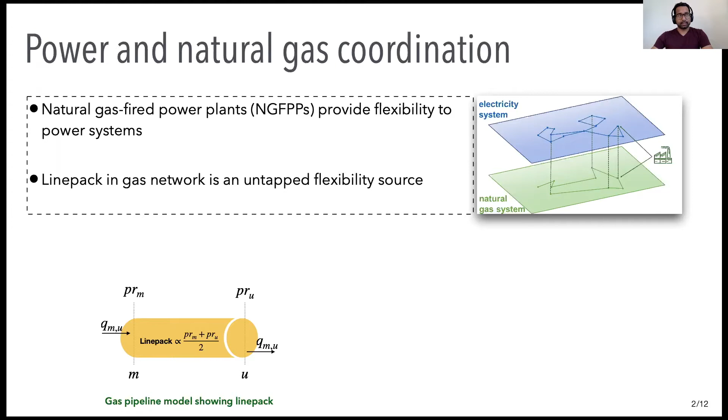Let's look at this model of a gas pipeline between nodes M and U. QMU denotes the flow of gas across the pipeline. Pressure M and pressure U indicate the nodal pressures that are usually bounded by physical limits.

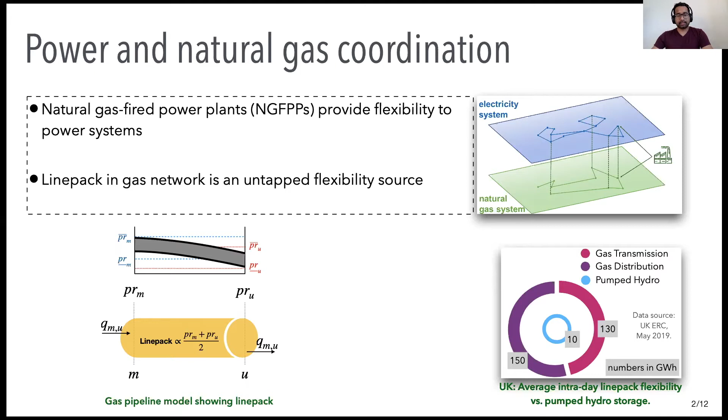Power systems across the world are evolving such that renewables supported by flexible generators such as gas-fired power plants are replacing coal. This interdependence between the gas and power sectors means that gas operational constraints are becoming more and more relevant in the day-ahead power dispatch problem.

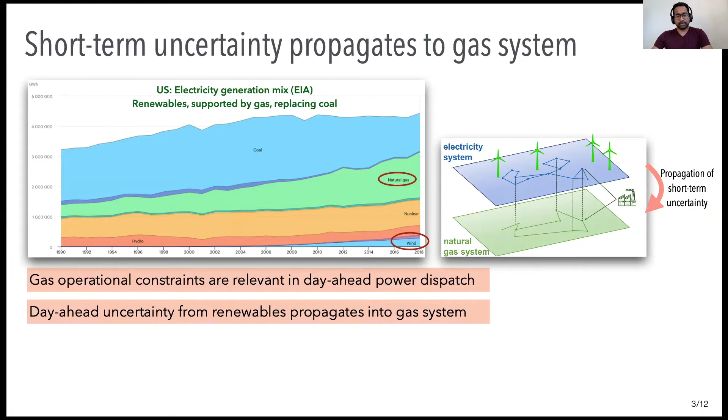Moreover, short-term uncertainty propagates from the power systems to the gas side, which causes congestions in the gas network, as well as results in unavailability of fuel for the gas-fired power plants. This, in addition to endangering the reliability of the gas supply system, also hampers the amount of flexibility that it can provide to power systems. That brings us to our research question.

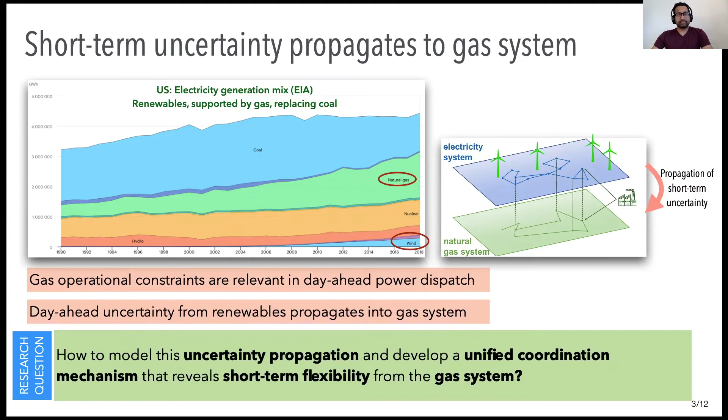How do we model this uncertainty propagation and develop a unified coordination mechanism that reveals short-term flexibility from the gas system? The answer lies in stochastic power and gas dispatch.

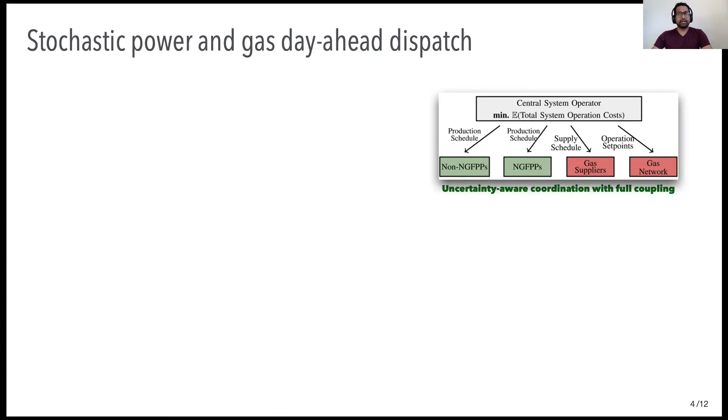We consider a fully coupled power and gas system such that a central system operator dispatches both the power and the gas systems. In a generic form, we can write the joint optimal dispatch problem like this.

The objective function here minimizes the expected cost of operation for the power production and gas supply. The decision variable x tilde contains the decisions such as production from various generators, nodal power injections in the electricity grid, gas suppliers' injections, as well as the gas network variables such as nodal pressures and flows, which are needed to operate the line pack.

We write the inequality constraints G of I as distributionally robust chance constraints defined over an ambiguity set pi. We assume that the true probability distribution of uncertainty faced by our problem comes from within this ambiguity set. The parameters epsilon denote the violation probability for each constraint. These inequalities involve generator production limits, gas supply limits, power flow limits in the lines, and similar engineering constraints.

The functions h of j are linear in x and ensure the balance of gas and power in the system, and they capture the intertemporal dynamics of operating the line pack.

Lastly, the functions wk are non-convex quadratic equality constraints, also known as Weymouth equations. These equations govern the physics of steady state flow of gas in a pipeline as a function of the difference in squares of pressures at the terminal nodes.

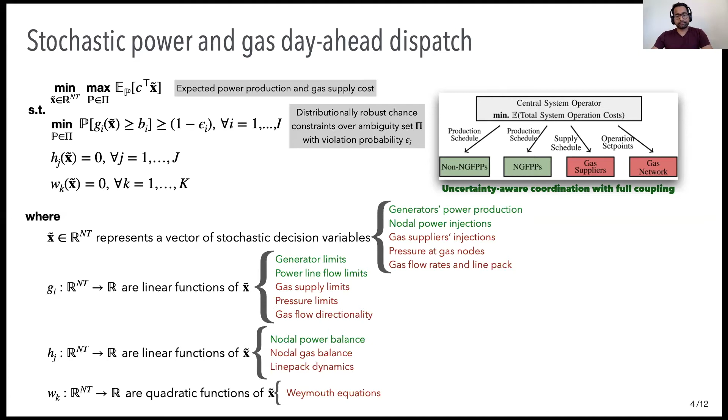There are two issues with this problem in its current form. First, the variables are stochastic, which makes these constraints infinite dimensional and the problem becomes unsolvable. Second, the non-convex Weymouth equations need to be convexified in order to ensure global optimality is reached. I will now discuss how we tackle each of these challenges.

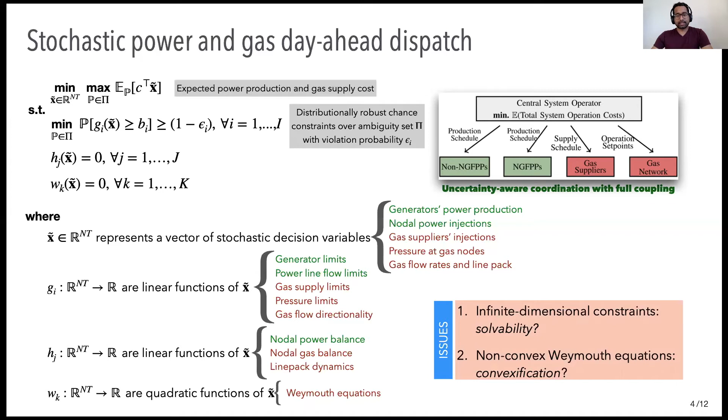First, to ensure solvability, we adopt moment-based ambiguity sets for our uncertainty. Assuming that wind forecast errors are the only source of uncertainty, we define ambiguity set pi that contains all probability distributions which have a given mean and covariance. We assume that the mean and covariance are available through analysis of historical forecast errors.

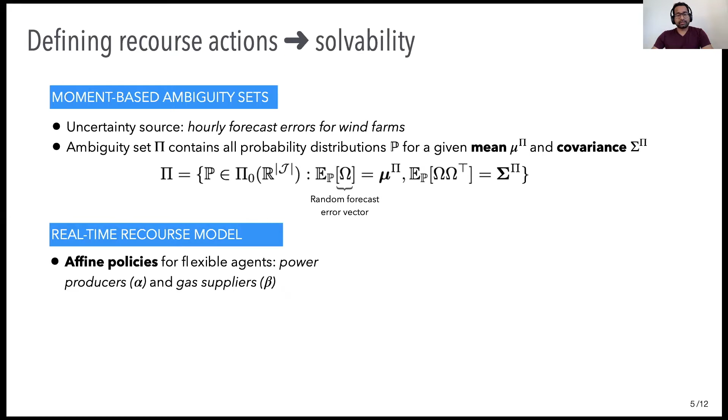To mitigate the uncertainty in real time, we adopt recourse actions for flexible agents in the form of affine policies. Optimal affine policies are obtained already while solving the day-ahead dispatch problem. And thus we reduce the cost of redispatch, which needs to be done closer to real time. I'll illustrate the affine policies through a simple power network setup.

Here we have 2 wind farms, 3 flexible generators, and 1 inflexible load. During the real-time operation stage, wind farm production W tilde is made up of day-ahead forecast W hat and some random forecast error omega that is realized. Depending on whether there is a surplus or deficit in the system, flexible generators increase or decrease their production, which balances the forecast error uncertainty in the system.

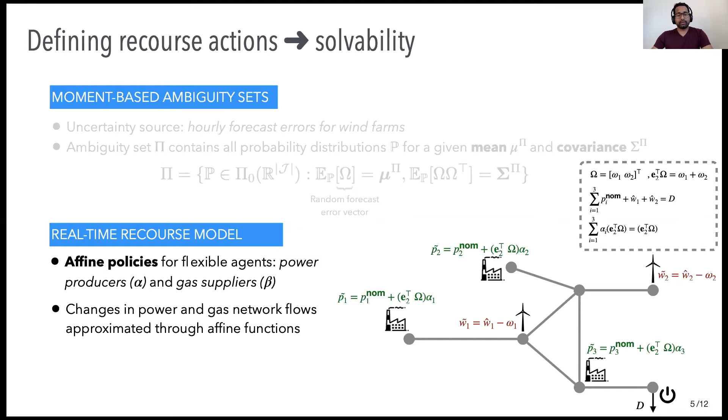The 2 equations which ensure supply-demand balance in the system are shown here. While the first equality ensures balance in the case of perfect forecasts, the second equation ensures exact activation of flexibility during real time to counter the random forecast errors. Secondly, we assume that the changes in flow in power and gas networks can be approximated through similar affine functions. By adopting these affine recourse actions and following the well-known Chebyshev's conic approximation, we convert our infinite dimensional problem into convex second-order cone constraints.

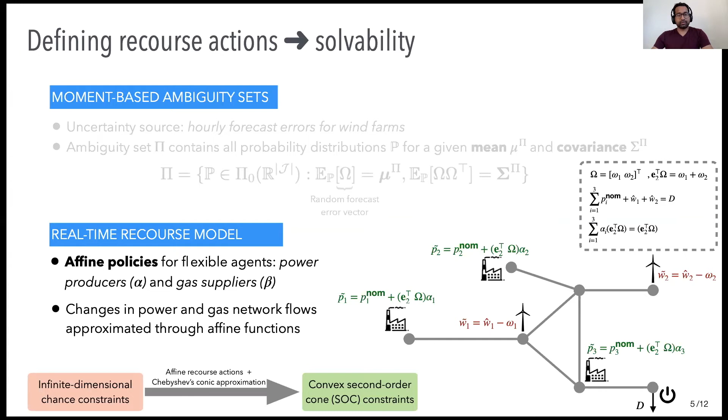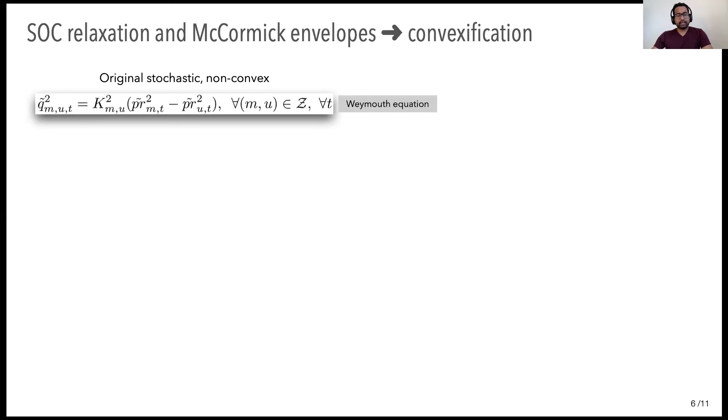To handle the stochastic non-convex Weymouth equations, we define auxiliary variables gamma and rho, which are the sensitivities of gas flows and nodal pressures to uncertainty. Expanding the equality and then separating the terms which are independent and quadratically and linearly dependent on uncertainty, we obtain 3 separate equalities. For the first 2, we relax them using the standard second-order cone relaxation, neglecting the non-convex inequality as shown in the figure.

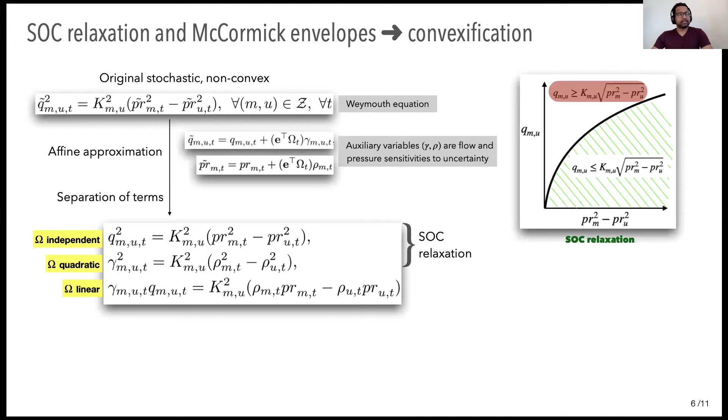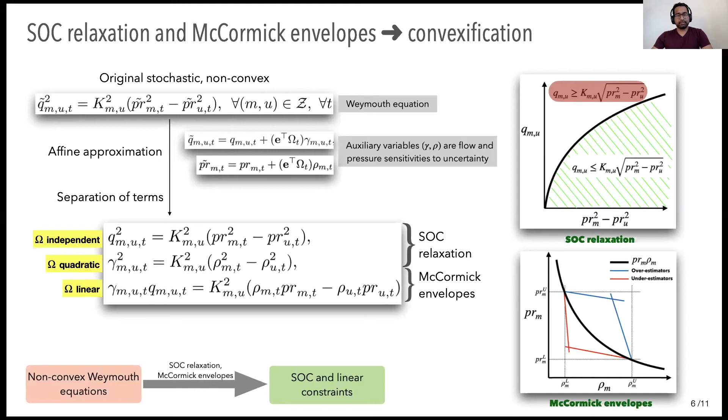The same strategy, unfortunately, cannot be applied to the last equality because of the presence of the bilinear terms. As a result, we replace each of these bilinear terms with the McCormick envelopes. Adopting these 2 steps, we have now relaxed the non-convex Weymouth equations into second-order cone and linear constraints, making the overall problem convex and solvable. We obtain the final tractable form. It is a second-order cone program that is solvable very efficiently by off-the-shelf commercial solvers.

Mean and covariance of forecast errors, which are extracted from historical data, are used by the central system operator to assign not only the optimal dispatch, but also optimal flexibility procurement in the form of affine policies. The parameters epsilon are chosen such that they represent the risk preference and risk tolerance of the system operator, and consequently 1 minus epsilon becomes the confidence level that the chance constraints hold.

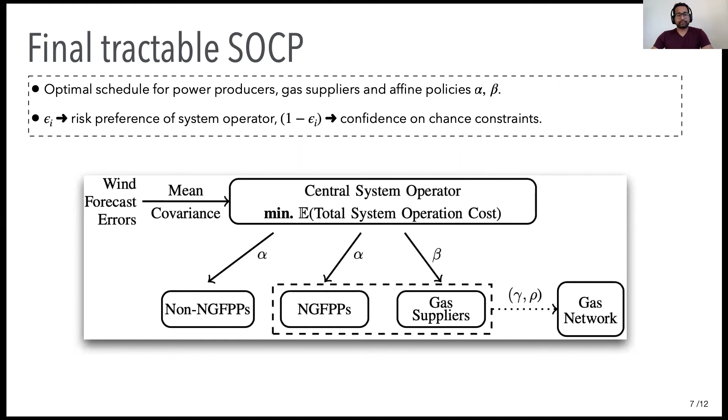To test our methodology, we select an IEEE 24 bus reliability test system coupled with a fictitious 12-node gas system. 7 out of 12 generators are gas-fired, and we have 2 wind farms in the system. On the gas side, we have 2 gas suppliers which inject gas into the network. We obtain the bounds for defining the McCormick envelopes by solving a deterministic version of the problem by assuming perfect forecast of wind farm production.

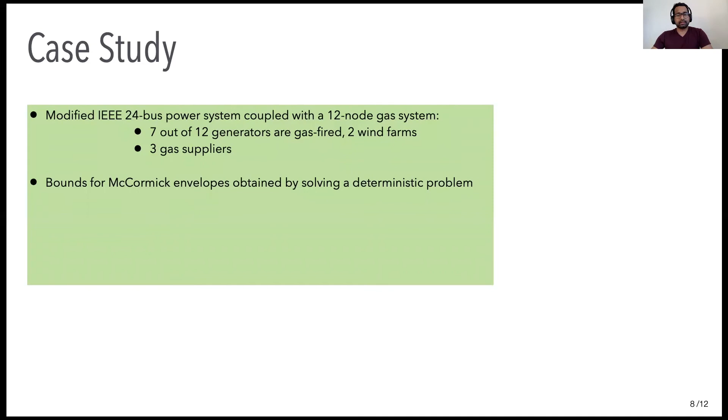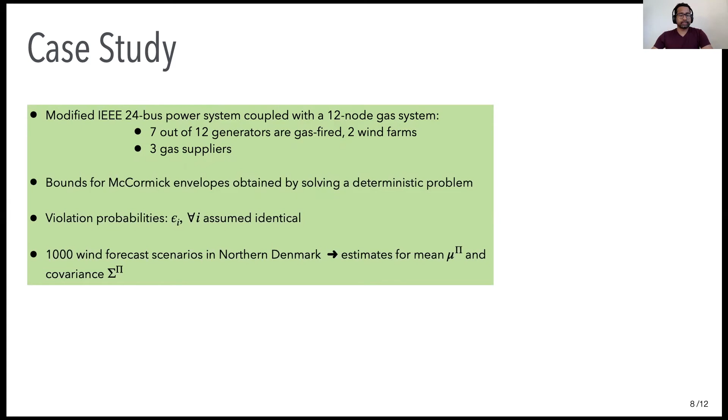We assume that all the chance constraint violation probabilities are identical. And finally, we use 1000 wind forecast scenarios for wind farms located in northern Denmark to compute the mean and covariance. The figures here show the coupled power and gas networks. The gas-fired generators, which link the 2 systems together, are enclosed in red rectangles.

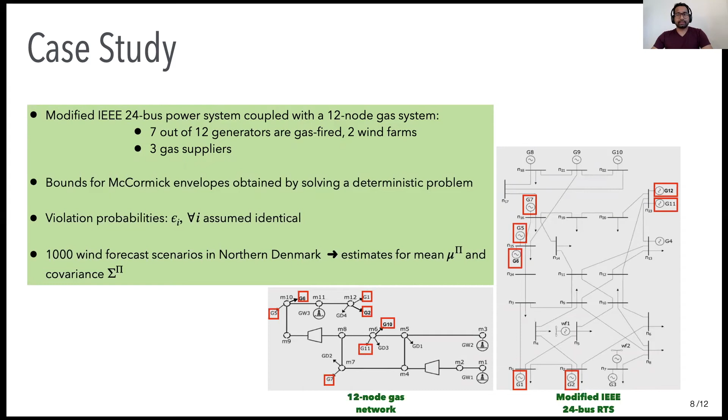Coming to results, the figure shows how the optimal dispatch and affine policies for the power generators look. These generators have been grouped into gas-fired and non-gas-fired power plants. It was observed that in the hours when specific generators are not dispatched at all, or if they're fully dispatched, they're not assigned any affine policies. Similarly, lower cost flexibility sources are preferred.

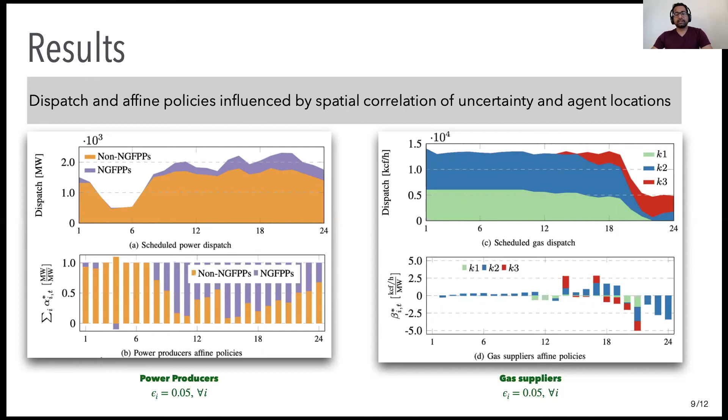Similarly, on the gas side, we observed that the most expensive gas supplier, K3, does not get dispatched or assigned any affine policies in the earlier hours of the day. Moreover, the gas injections in the early hours of the day ensure that enough supply is available for the gas-fired power plants from the line pack during the later hours. Finally, it was observed that not only cost, but also the spatial correlation of uncertainty and relative location of the flexible agents decided the allocation of affine policies, which is a very nice result.

To test the exactness of the convex relaxations we adopted in the solution, we use a metric that we call the normalized root mean square relaxation gap. For a constraint X_m,u,t equals Y_m,u,t, which is relaxed to X_m,u,t less than or equal to Y_m,u,t, we compute the root mean square relaxation gap using the optimal values obtained by our day-ahead dispatch problem. They are normalized by the right-hand side of the original equality constraint and aggregated to obtain this metric.

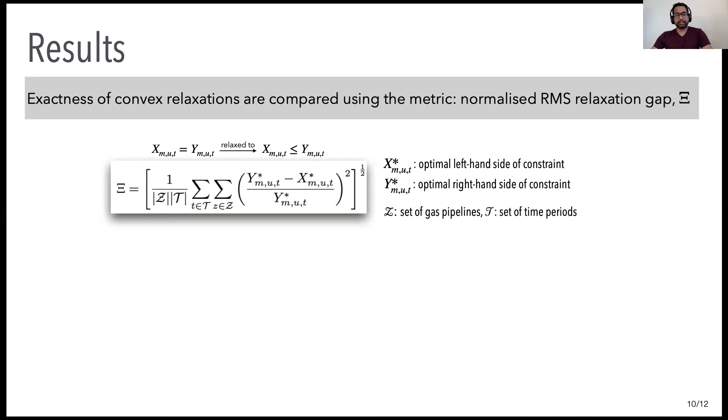For epsilon equals 0.05, for the second order cone relaxations, we obtain the following relaxation gaps. The charts show the normalized relaxation gap for each pipeline for every hour of the day. In general, the relaxation obtained for the uncertainty-independent terms of the Weymouth equation, shown on the left-hand side of the figure, is satisfactory.

However, the remaining gap in exactness can be attributed to the structure of the gas network, which is non-radial. Also, the intertemporal dynamics of the line pack, and in particular, the constraint which ensures sufficient line pack is available for the next day, require unusual gas flows at the start and end of the day. This is more pronounced for the inequality obtained in the second curve, from the quadratic terms of the uncertainty.

For the McCormick relaxation, as expected, we calculated the bounds trivially and they are quite loose. This results in a higher relaxation gap. Moreover, we also have adversely negative values of gamma and rho for certain hours for some pipelines, and that results in the normalized relaxation gap exceeding the value of 1.

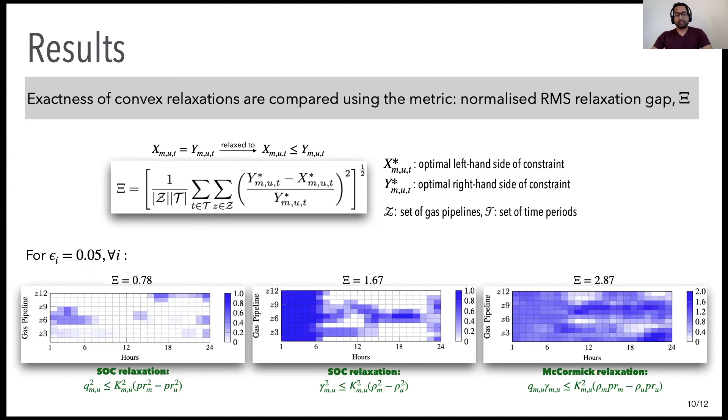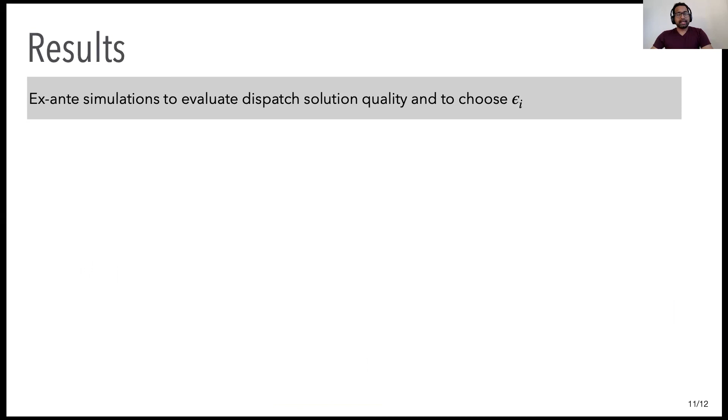To evaluate the quality of the dispatch solution and to choose the right epsilon, we performed ex-ante simulations to estimate the violation probability for chance constraints. Fixing the optimal dispatch and affine policies we obtained, we used 1000 wind realization scenarios distinct from those used to estimate the mean and covariance, to test the feasibility of the constraints in real time. We defined an indicator function that takes the value of 1 if at least one constraint is violated in a given scenario. Aggregating and normalizing this by the number of scenarios gives the ex-ante violation probability.

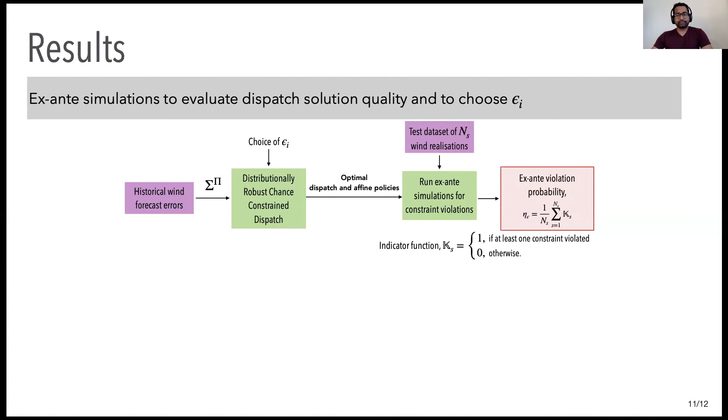To understand the constraint violations further, we studied the susceptibility of individual groups of constraints, such as generator production limits, pressure bounds, and so on, for different values of epsilon. We observed that the power generation limits, the gas supply bounds, and the unidirectionality of the gas flow we assumed are most susceptible to violations. These results, however, are very network specific.

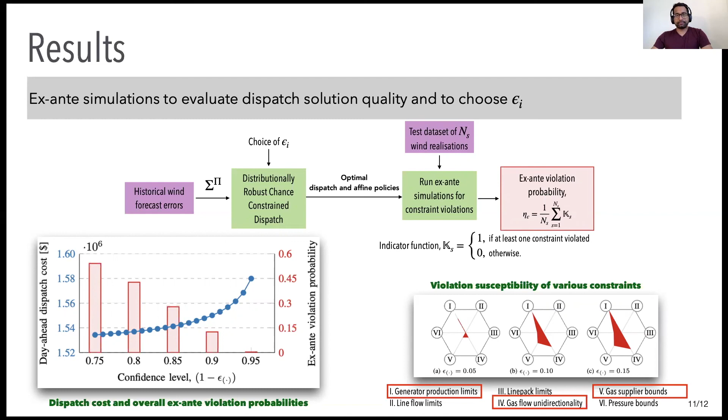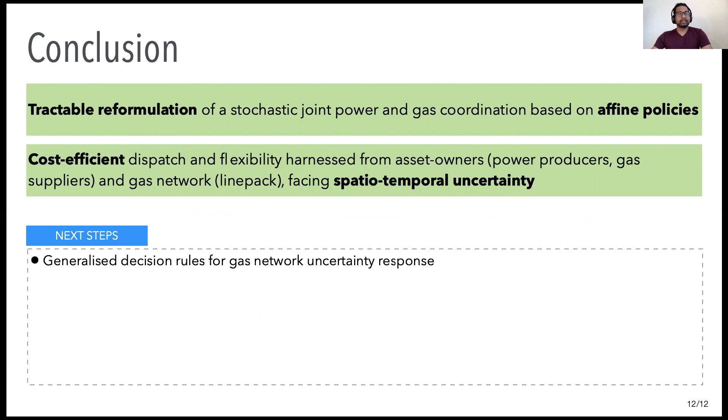To conclude, in this work we performed a tractable reformulation of stochastic joint power and gas dispatch based on affine policies. We showed that cost-efficient dispatch and flexibility procurement from a variety of agents can be performed, keeping the spatio-temporal uncertainty in mind. As next steps, we would like to drop the assumption of affine response by network variables and consider generalized decision rules.

We would also like to tighten the convex relaxation through iterative algorithms and other mechanisms. Further, it would be vital to consider a bidirectional gas flow model. It would also be nice to extend the coordination to a market context. Out-of-sample simulations are also needed to evaluate effectiveness and to provide guarantees of optimality and feasibility for our problem. Finally, instead of the coupled power and gas system, it would be nice to consider coordination with limited information sharing. Thank you for your attention.